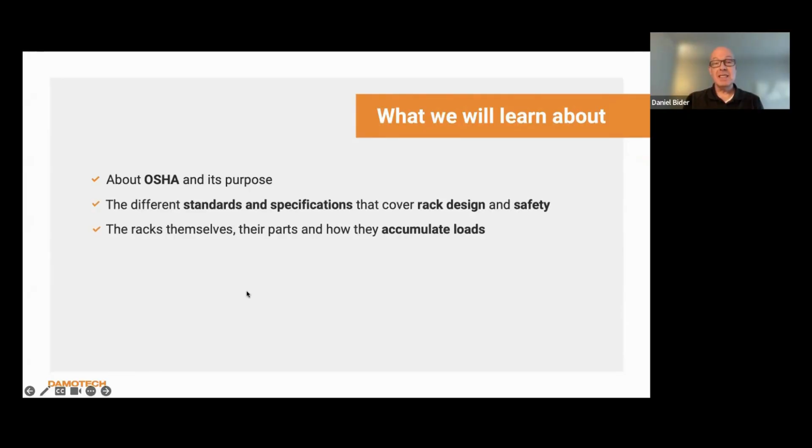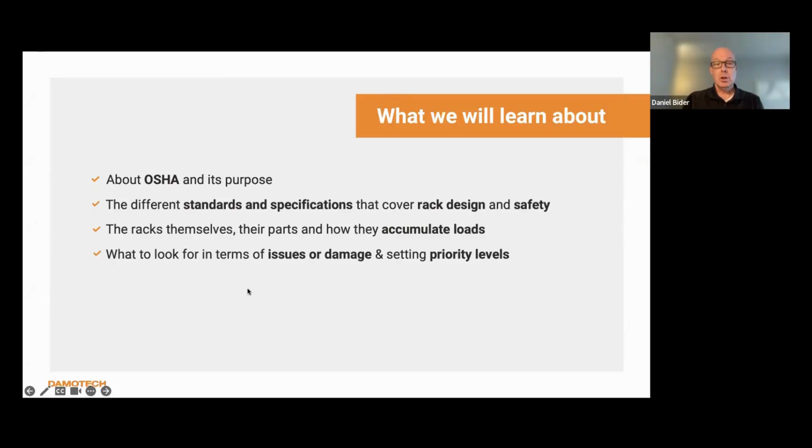So what are we going to learn about today? Well, we're going to learn about OSHA and its purpose, the different standards and specifications that cover rack design and safety. We're going to look at the racks themselves, their parts, and how they can accumulate loads. What to look for in terms of issues or damages, and setting priority levels. Creating your own inspection protocol and understanding how to set those. So, from small damages to rack collapse.

My observation after years of visiting warehouses is that people do not always know what to do or who to call to ensure the safety of their pallet racks. Employers are responsible for providing a safe workplace for all workers covered in the OSHA Act. It's not just about not getting in trouble with OSHA. It's about the safety of your workers. OSHA standards are meant to avoid trouble from happening. You simply do not want to be held responsible for any collapse.

So what is OSHA and its mission? First and foremost, OSHA cares about safety. The US Congress created the agency under the Occupational Safety and Health Act. As a matter of fact, President Nixon signed it into law back in December of 1970. OSHA is a federal agency, part of the United States Department of Labor.

So OSHA is mandated to establish and enforce safety standards, track injuries and illnesses, require safety training wherever necessary, and conduct inspections and investigate complaints. OSHA inspectors, however, rarely give advance notice of their visits, which may be completely unsolicited. Workers, on the other hand, may also request an inspection. If there is no union and no safety committee with a worker representative, OSHA only has to inform management of their arrival.

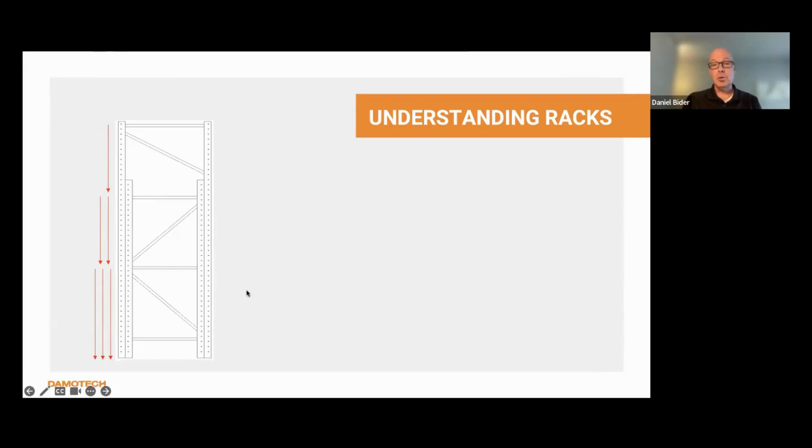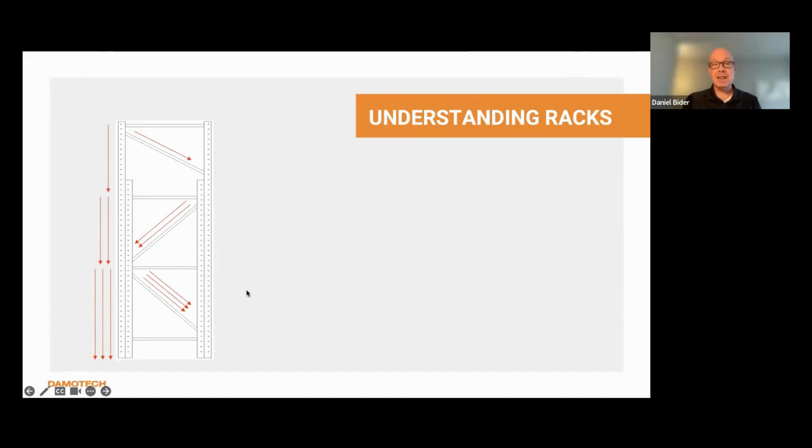So let's begin by first understanding racks. Racks are designed to support weight in the form of the pallets that are located on the beams. This causes load stress. Load stress that begins from the top and accumulates its way down to the bottom, mostly through the columns, that carry a minimum of 95% of all of the load weight. However, the load weight or load stress can also be distributed through the diagonal braces to an amount of 3 to 5%. This results in the most critical part of your rack being the base of your rack. This is where all of the load weight actually accumulates and makes that part of the rack the most vulnerable.

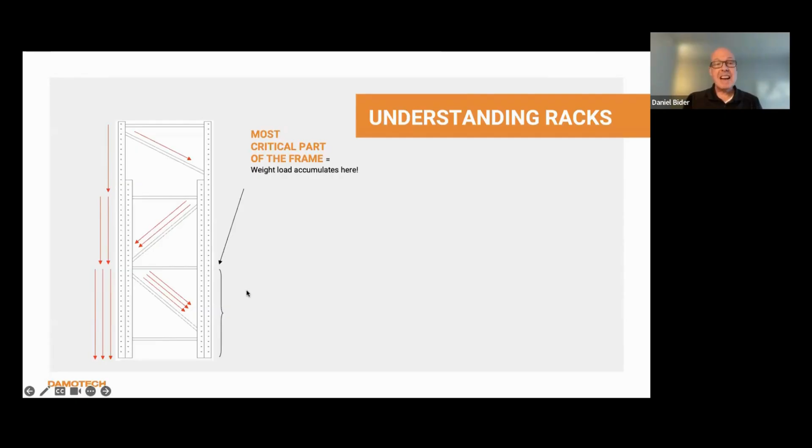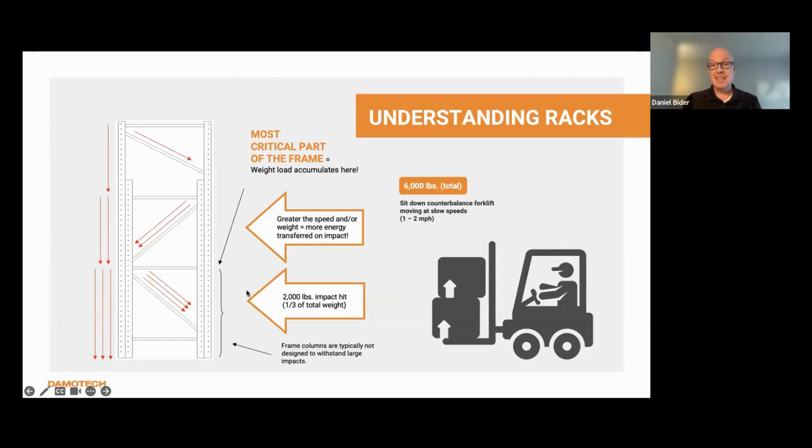But this is only half of the equation. The other half of the equation is actually the forklift. If we take a look at a standard sit-down counterbalance machine weighing approximately 6,000 pounds, moving slowly at 1 to 2 miles an hour, it creates a force of roughly 1/3 of its overall weight, which in this case is 2,000 pounds of impact energy that gets transferred directly onto the rack. Now, of course, the faster the machine is moving, or the more weight that it actually carries, the greater the amount of energy transferred on that impact. And keep in mind, frame columns are not designed to withstand any amount of impacts. They're strictly designed to support weight.

So, knowing that, how do I prepare my racks for an OSHA visit? Well, what we're going to cover is the following.

How to identify the damage and issues on your racks. Next, we need to look at how to assess the priority level of the damaged racks and issues identified. It'd be good to have a way to communicate the situation clearly so that everybody that is involved in the process understands what these issues and what these damages are and where they are located. And finally, we need to create a plan on how to address these issues or damages and determine the best way to move forward.

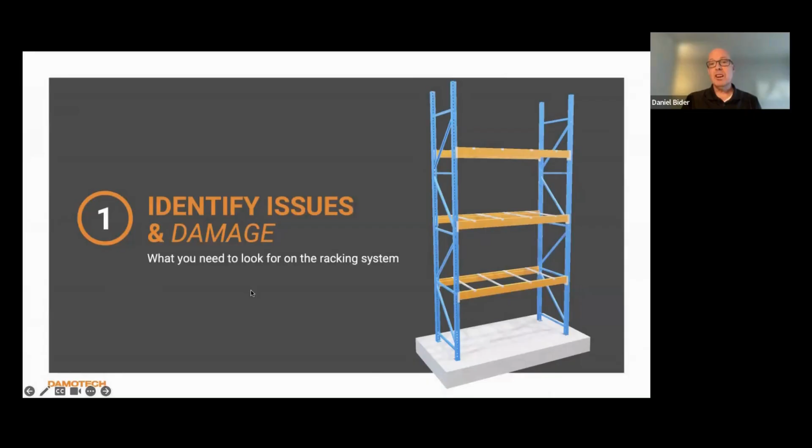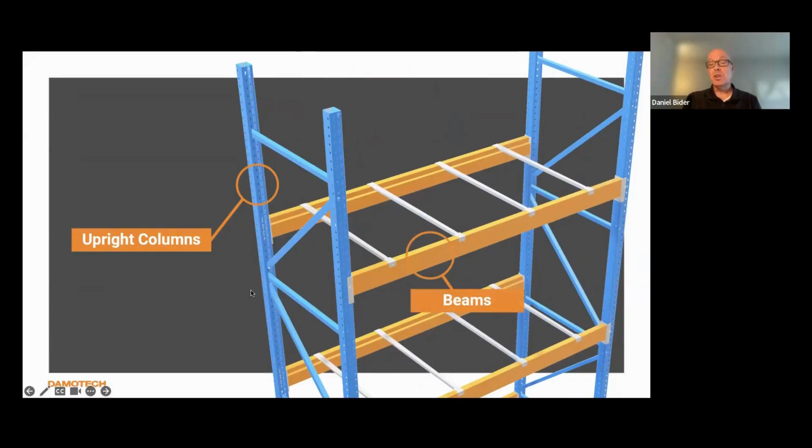So first, let's take a quick tour of a racking system. Here's what you need to look for. Upright columns. Upright columns are the components of actually the upright itself, the front and the back column. We look at beams. Beams are there to support the pallets between the front and the back beams. Safety bars. They prevent pallets from falling through the beams and are attached to the front and the back beams.

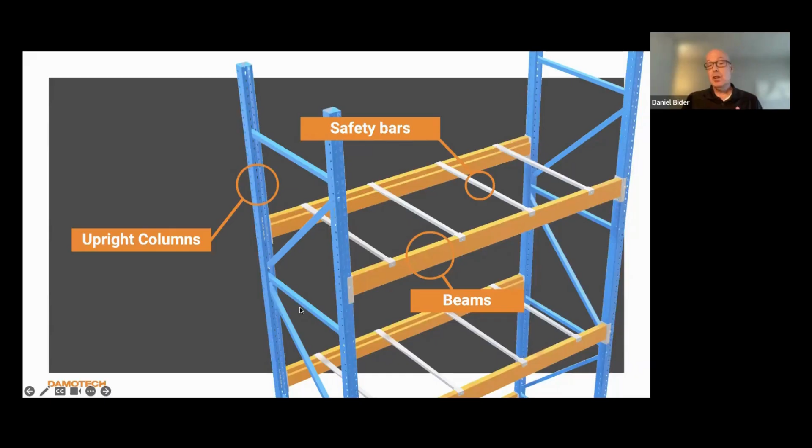So when inspecting your racks, this is what an OSHA inspector will look at. Uprights. They look for frontal and lateral deflections, plumbness, twisting, rusting, any kinks or dents that could be identified as a potential damage to your upright. When it comes to the beams, they look at deflections. They look at the connecting points, the safety pins, are they present? Safety bars, again, they look at things as, are they present? Are they secured? Do they show any signs of damage?

Next, we look at braces, be it horizontal or diagonal, and you also need to take a close look at the bottom of the columns for the foot plates and anchors. When doing your inspections, make sure to pay attention to, in case of the braces, are there deflections to them? Are they actually present? Have they been torn off? Are the welds damaged? When looking at the anchors, keep in mind that anchoring the pallet rack to the ground is recommended to ensure its stability and resistance in case of an impact.

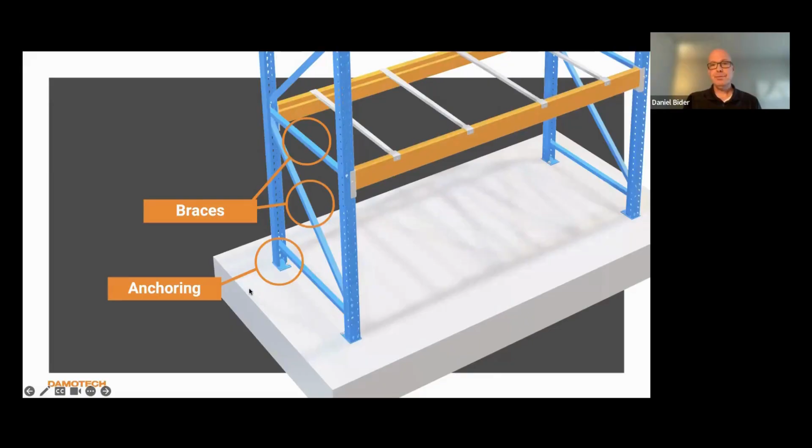So you should be looking for things such as, are the anchors even present? Have they been sheared off? Have they been bent under an impact? Are the nuts present? Are they nice and tight, or are they loose? At both extremities of any rack system, the racks should be taller. This is done as to prevent packages from falling over onto a pedestrian pathway. Now, having said that, this is not necessarily in the code, but it is recommended by the Rack Manufacturers Institute, otherwise known as RMI. It is especially important to keep in mind if you are in a high seismic zone.

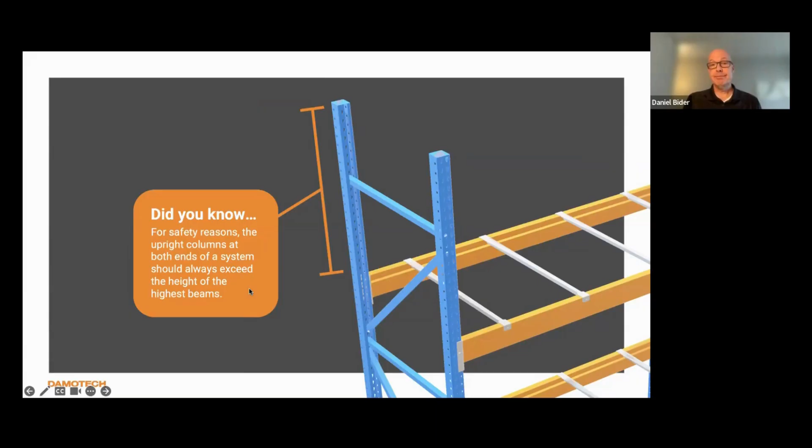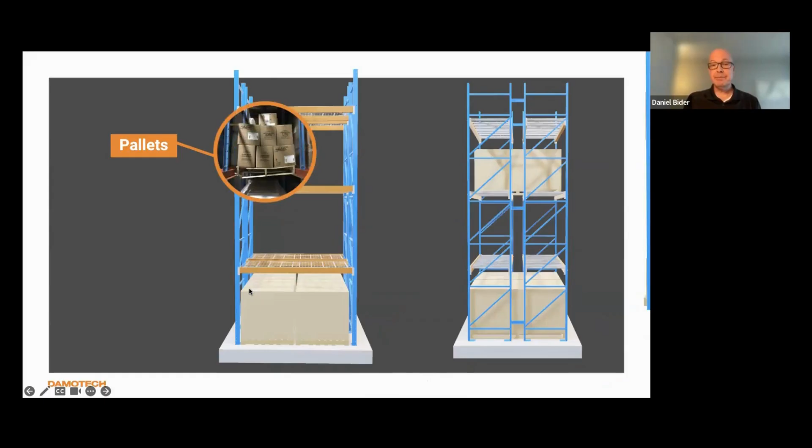So, some of the other things that we look at: pallet positioning and pallet conditions. Are the pallets properly positioned on beams? Are the pallets themselves in good shape, good condition? Safety pins. These are small, but mandatory safety devices used to prevent beams from dislodging. Wire mesh decks. Wire mesh decks are basically an extension of safety bars, designed to help prevent pallets, products, and debris from falling between beams.

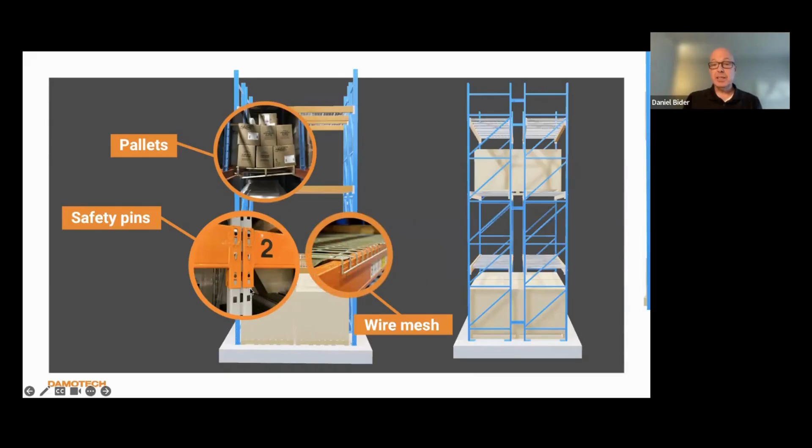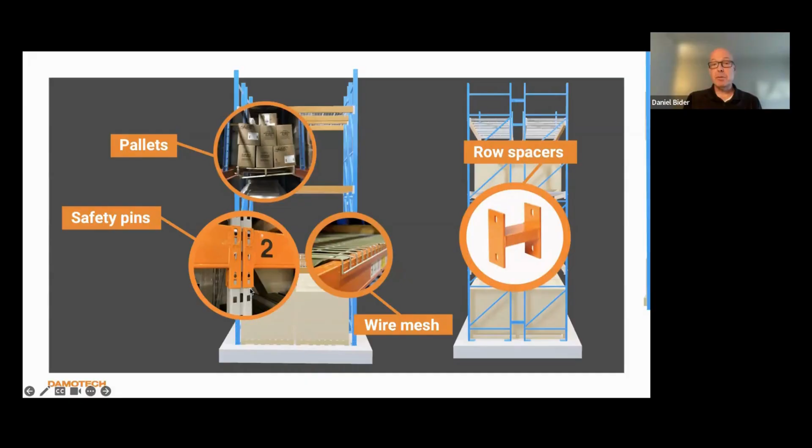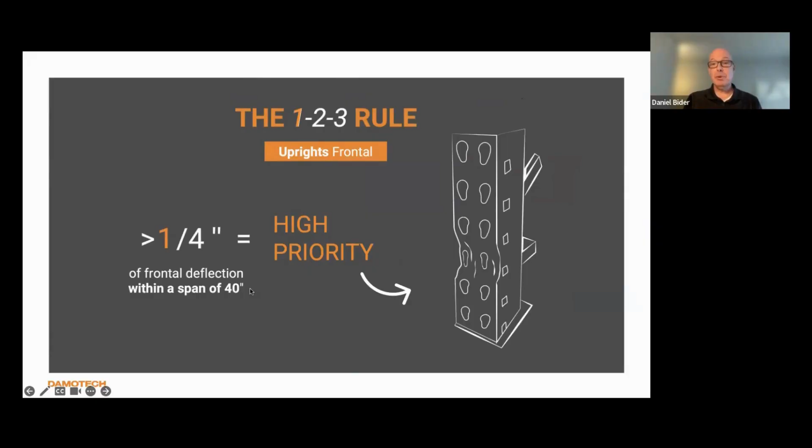Row spacers. They play a very important role as back-to-back racks attached to one another gain strength when one of the racks gets impacted. These are all very important components of a racking system. Now that we've looked a bit at how the racking system works, what should you look for in terms of frontal and lateral damages, as well as brace deformation? Let me show you what we call the 1, 2, 3 rule, which will help you determine in what priority damages should be addressed before an OSHA inspector shows up.

This rule allows you to evaluate the degree of deformation on upright elements. 1, 2, 3 refers to the 3 damage tolerances. So 1/4, 2/4, and 3/4 of an inch. The 1, 2, 3 rule can be helpful for you to assess rack damage in your warehouse. Not only is it easy to remember, but it will make your inspection more concise.

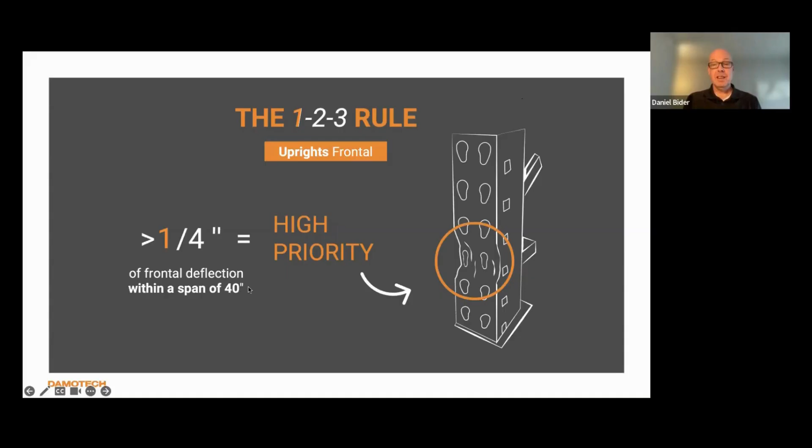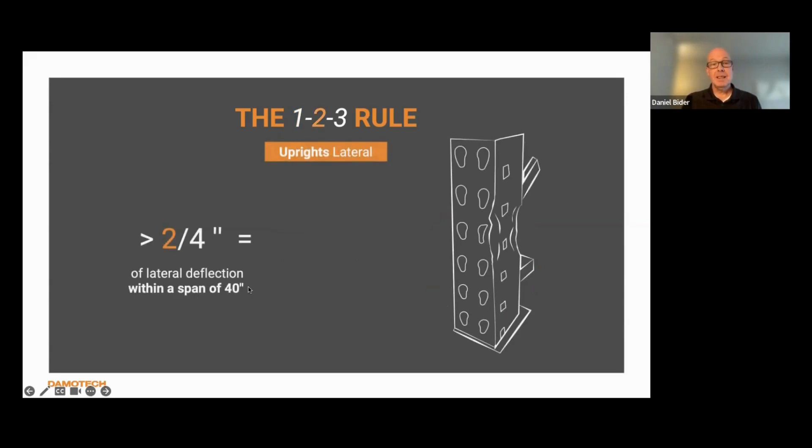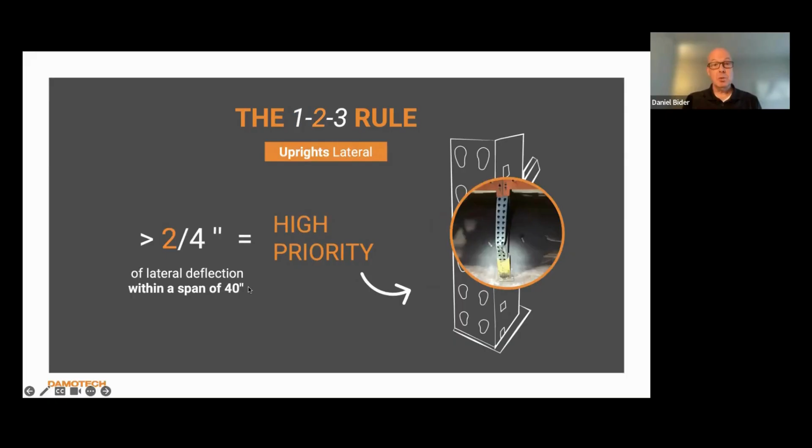So let's start with the easiest, a frontal deformation. If your damage is greater than 1/4 of an inch, as we can see from this image here, you need to start taking some actions, whether it's to replace or to repair the damaged rack. Lateral deflection. If the damage is greater than 2/4 or 1/2 an inch, then you need to start looking at taking some actions as well, as this image right here would highly suggest. And for a brace, if the damage is greater than 3/4 of an inch, either a brace being a horizontal or a diagonal, you need to address this situation.

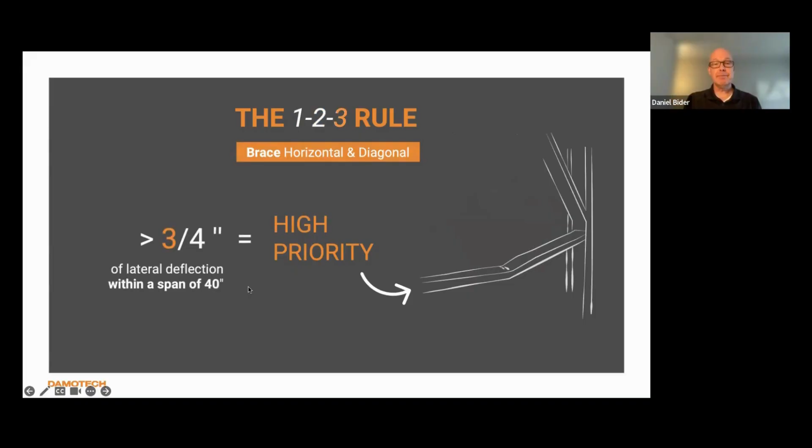If you need help in navigating rack damage assessment, for example, what to look for, various resources are at your disposal. You can download the assessment pocket guide. It provides clear guidelines to help you determine what to address when assessing a rack system's condition. You can also order a free safety poster and use it in your employees' break room, for example, to educate them on what to look for in terms of damages.

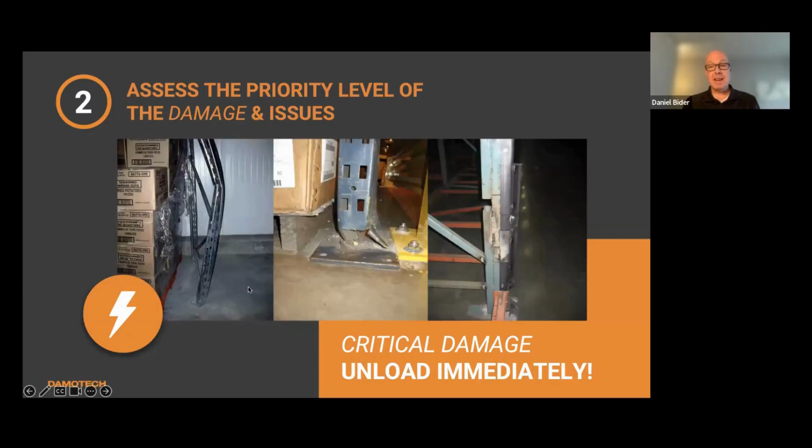So we wanted to present to you some high priority damages, as a matter of fact. Here we have even an example of some custom rack repair. The point of showing this isn't really to laugh about it, but to emphasize the importance of proper inspections. It's important to remember that even though rack welding can be considered an acceptable approach according to code, it's not recommended. A proper weld can be very difficult to achieve, and it can impact the metal and the rack's load capacity. If a damaged rack is not repaired correctly, then this damage can become a greater issue over a period of time.

Taking a quick look on the other end of the scale for low priority issues. Low priorities doesn't mean that you should forget about them. You should check back periodically to see if their conditions have evolved or if other damages have occurred. Remember, issues or damage can worsen, so several low priorities can easily and quickly become high priority. If in doubt, you always have the option to bring in an expert.

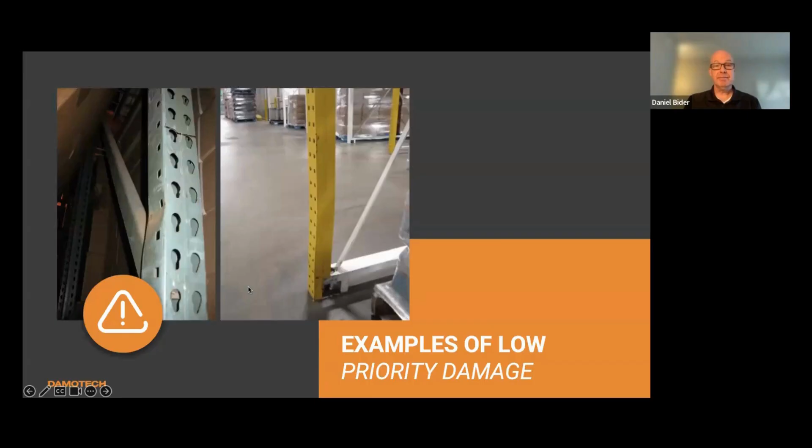Next, we talk about nomenclature. How do we communicate the information that we have identified in our inspection? Well, the nomenclature that we like to use is we break down a rack to its components. A rack or an upright is composed of two columns, front column being C1, back leg column being C2. Both of these columns are attached together via braces, both horizontal and diagonal.

Starting at the base, the first horizontal, we call it H1. First diagonal, we call it D1. Next horizontal, H2, next diagonal, D2, and it continues like that, H3, D3, H4, D4, so on and so forth, depending on the overall height of the rack. C1 also represents the front of the rack, whereas C2 represents the back. And when you want to refer to anchors, A1 represents any mention of anchors on the front column, while A2 represents the same, but on the back leg column.

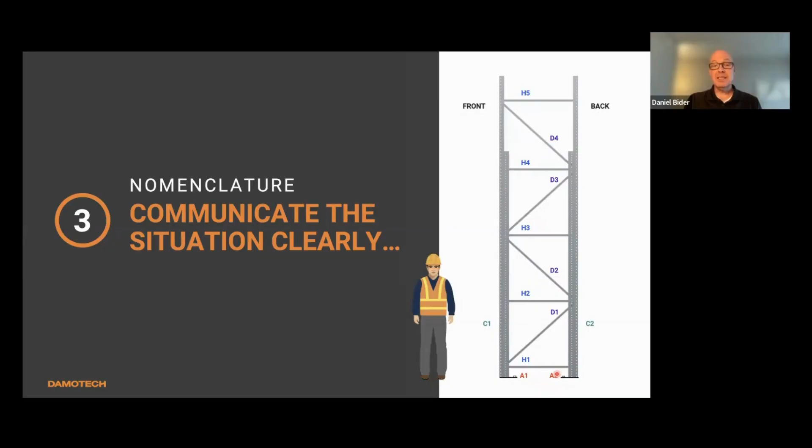To develop an inspection protocol, you must first address a few very important points. First of all, frequency. There's actually no clear guidelines about how often your racks need to get inspected. There is a best practice to do it once yearly by a third party and do your own assessments on a periodical basis, be it weekly, monthly, quarterly, based on your warehouse's activities.

Next, who should inspect? Who can do it? Who is qualified to do it? Well, when your employees are trained on recognizing damage, they should be okay doing the routine assessment. Again, when in doubt, we fall back to calling an expert. Speaking of that expert, bring in an expert once a year to give you a baseline, thorough inspection of your facility.

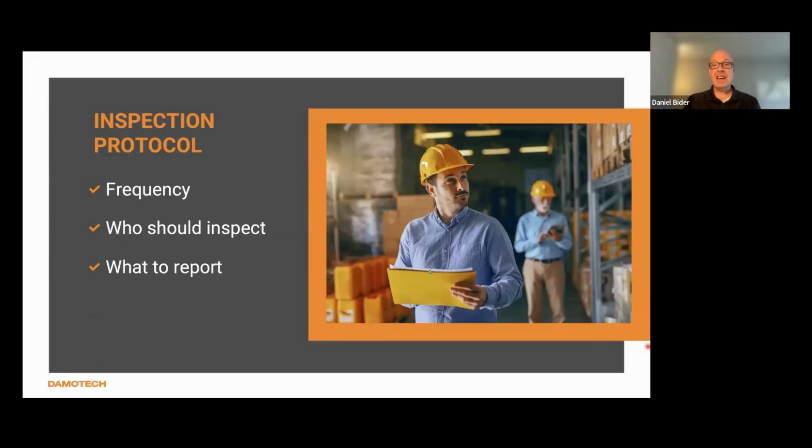What to report? Well, we'll get into more detail on the upcoming slides, but you need a system, be it on paper, Excel, or dedicated software to keep track of issues and how they are being addressed. Finally, we need to keep records. If OSHA asks for any documentation, you need to be able to provide them. Again, we're going to cover this in a slide that's coming up.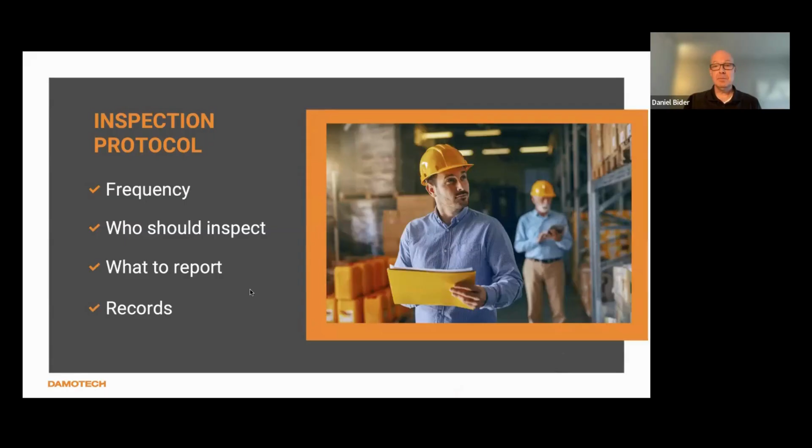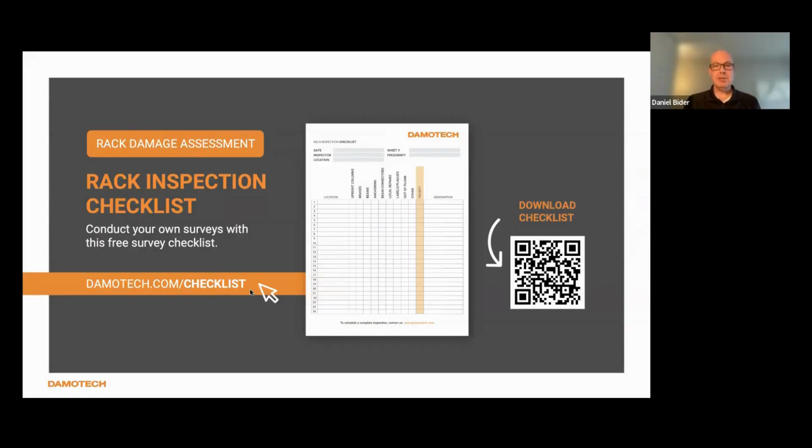So to help conduct your own rack damage inspections, you could use a rack inspection checklist. Here's an example of a checklist which can be downloaded for free on our website, something rather easy. We've simplified it as much as possible. There's a section to write the dates, the location where you performed the inspection, the inspector's name, sheet number, as well as the frequency, again, being weekly, monthly, or quarterly. In this inspection sheet, each row represents an individual damage or issue that needs to be addressed.

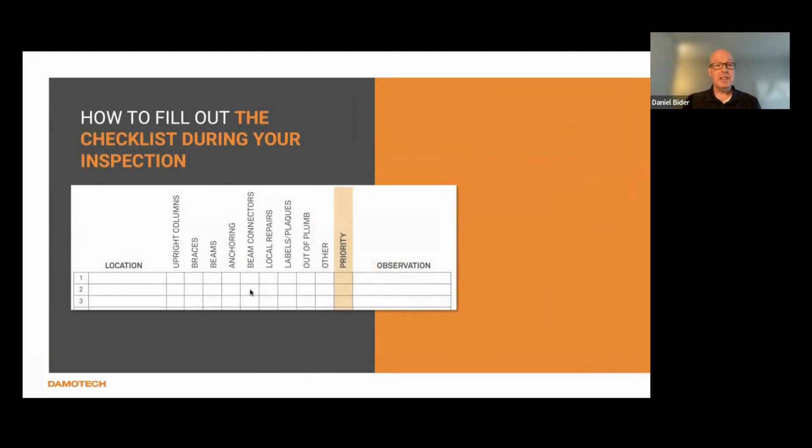So let's look at how you should fill out this inspection sheet. The first thing you'll want to fill out is the location of the issue where it's been identified. You need to have a proper way of identifying each upright in your warehouse. This allows other people looking at this sheet to easily find this damage. If you already have a numbering system, you can use that. If your racks don't have any numbering, you could use a simple approach where you start on the leftmost aisle of your system and move towards the right.

Then we want to fill in the corresponding cells that represent the damaged component. Along the top, you have all of the options for different elements that an issue can be on, for example, columns, braces, beams, etc. But you should not just add a check mark or an X. For example, you need to know if it's a front damage or a back damage. So in this instance, the upright column is indicated as 1, representing C1, the front column.

Next, you need to fill in the priority of that damage. U for unload, H for high, M for moderate, and L for low. In this example, U is clearly what is required to be shown here. Finally, there is a section for observations and any extra notes that you may feel are required and necessary to inform people as they come and follow up on these damages and issues that you have actually identified.

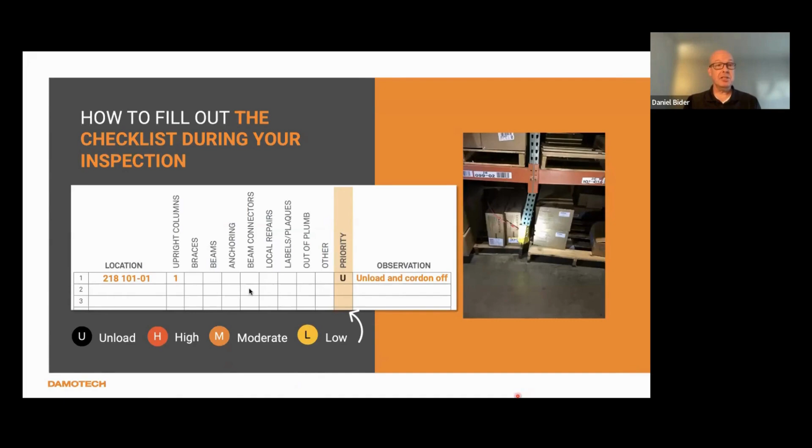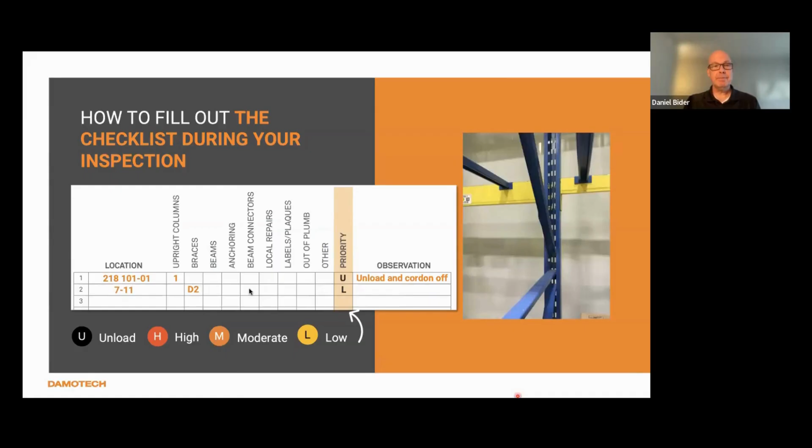Moving forward, quite simply, we're seeing here an example of a damaged brace. It is the second damaged brace, D2, and it is considered low in priority. Next example, and this is an interesting one. At this location, the fourth beam level is actually severely damaged. This is an unload situation. And so these pallets that are here should be removed until a new beam can be installed. Specifically here in your notes section, you got unload and cordon off. So these are instructions moving forward for the people to handle this situation properly.

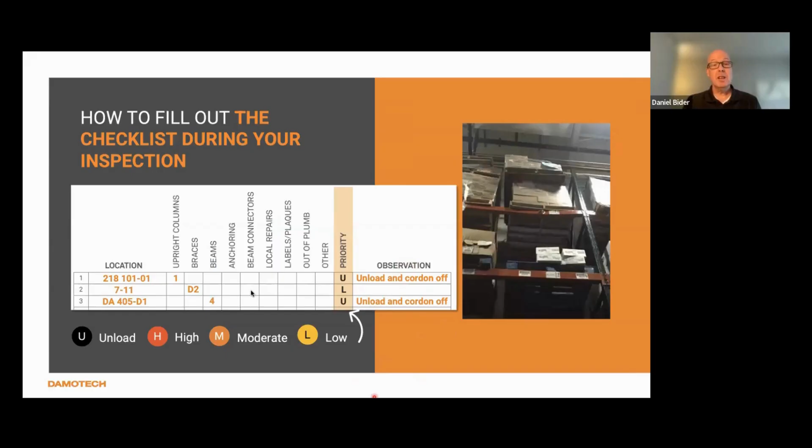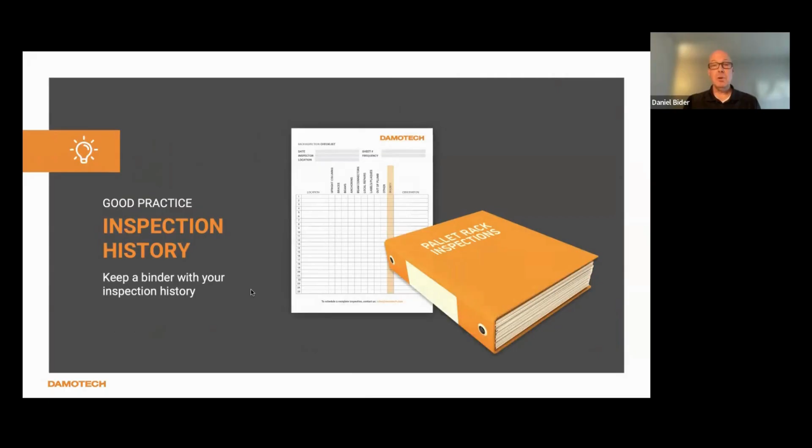It is good practice to keep a history of your inspections in a binder. This way, if OSHA asks for any documentation, you will be able to provide them right away.

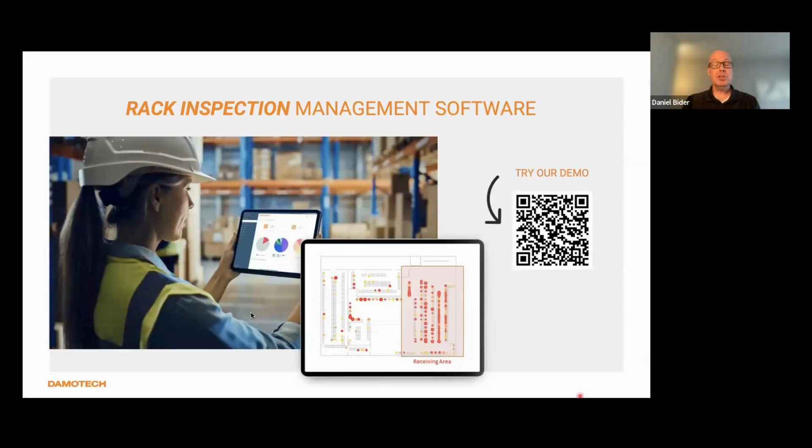But remember that no matter how you do it, make sure to keep records of your inspections or assessments. The OSHA inspectors will likely be asking for them. As part of keeping records, there's other documents that are also required. Most important is what's known as LARCs, which is an acronym for Load Application and Rack Configuration Drawings. They show all the configurations and capacities of all of your racks. You should not operate racks for which you don't have any drawings or capacities.

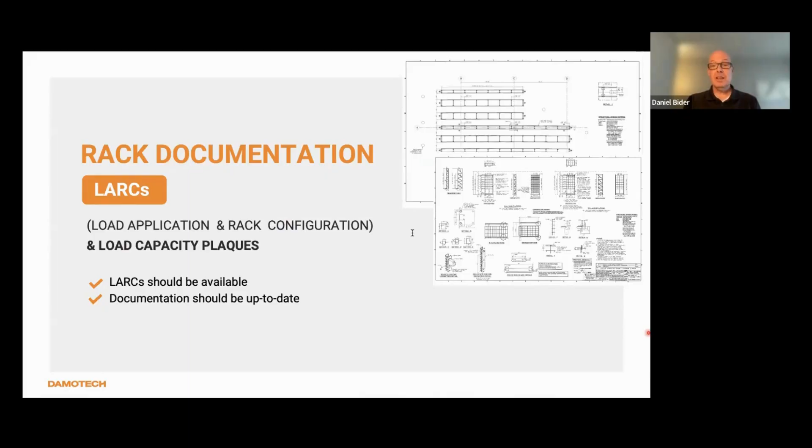Whenever you change beam levels, remove or add beams, you should have the corresponding LARCs because doing these things changes the capacities. You also want to make sure that your capacities are visible to everyone through either plaques or labels. It's actually in the code, so this is a must.

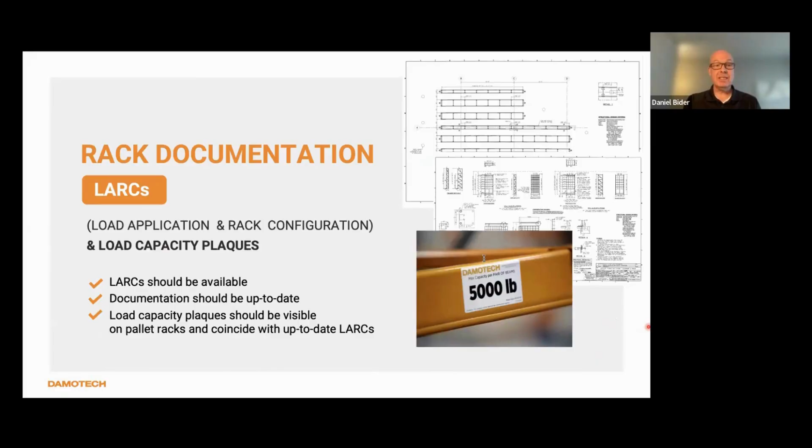Now, let's talk really quickly about how to address these issues. First, to avoid any injuries, remember to cordon off areas around the racks that need to be unloaded, since complete unloading of the racks is necessary before actually dismantling them. Also consider if it's necessary to replace a whole upright, or could you simply repair the damaged brace or column? And taking a step further, what about actual rack protection solutions?

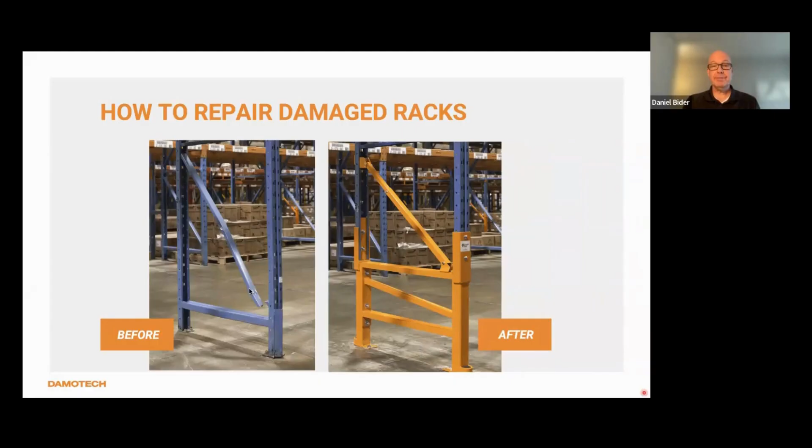If you want to minimize damage in your warehouse, you should install protection first. For example, it's important to protect your pallet rack uprights because they are the most vulnerable to impact. A post guard can prevent damage to your warehouse storage systems. It will also minimize maintenance costs over time, as well as extend the life of your racks.

But there is more than racks in your warehouses. Guardrails can help you protect your workers and pathways. Your building columns should also be protected, being the backbone of your building's structural integrity. They cost a lot to repair and can have dramatic consequences if severely damaged. A column protector will protect them from impacts by forklifts or any other machinery found in your facility.

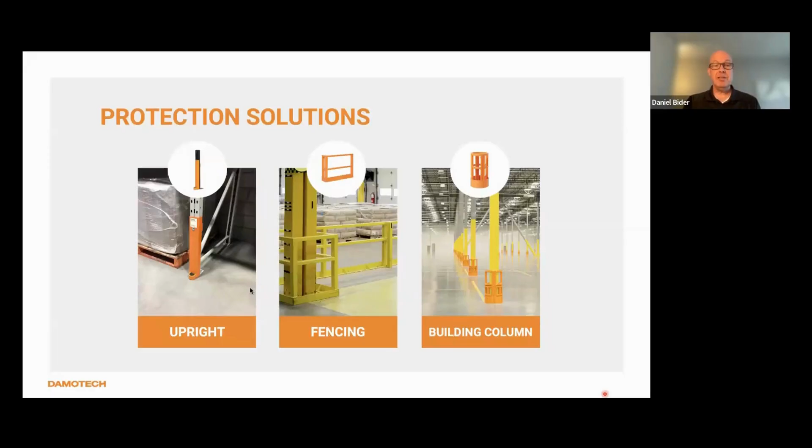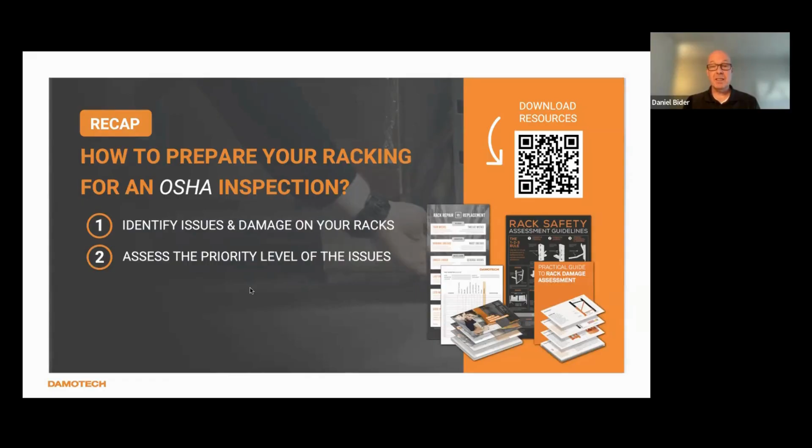Let me remind you of the steps that you can follow to prepare your warehouse for an OSHA visit. First, identify issues and damages on your racking system. Don't forget the 1, 2, 3 rule. Assess the priority levels of these issues, whether it's low, moderate, high, or if you must unload right away.

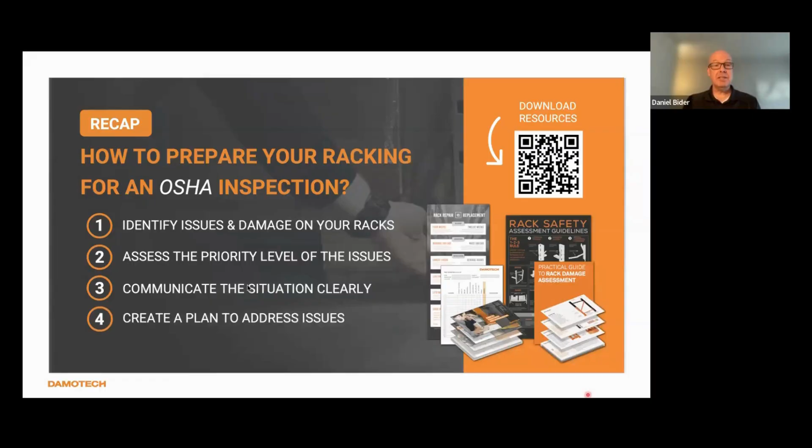Communicate the situation clearly and keep track of it by using different available tools like an inspection checklist, a binder, or even a rack inspection management software. Finally, create a plan to address the issues identified in the inspections moving forward. As you can see, the best time to plan for an OSHA inspection is before it actually happens. Your workplace should always follow OSHA regulations and standards.